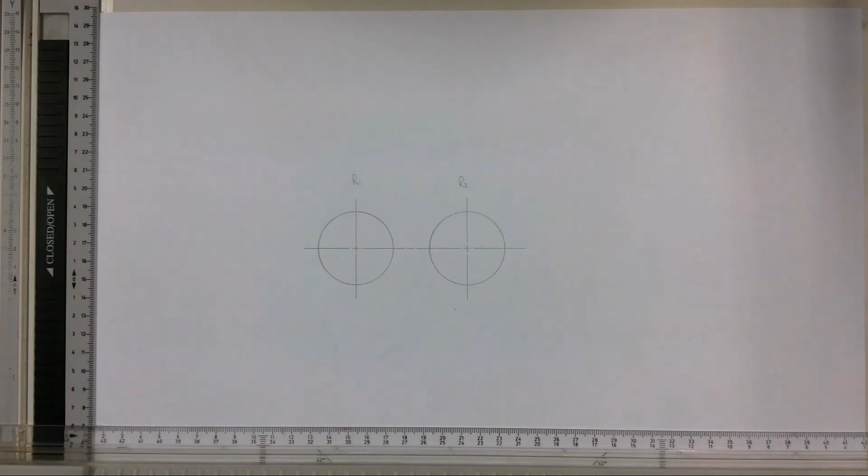The arcs, circles with arcs, and we will be including and excluding these two circles that we have in front of us with a diameter each of 40, so a radius of 20. And I've written down R1 and R2 because they're obviously two different circles. However, they do have the same radii

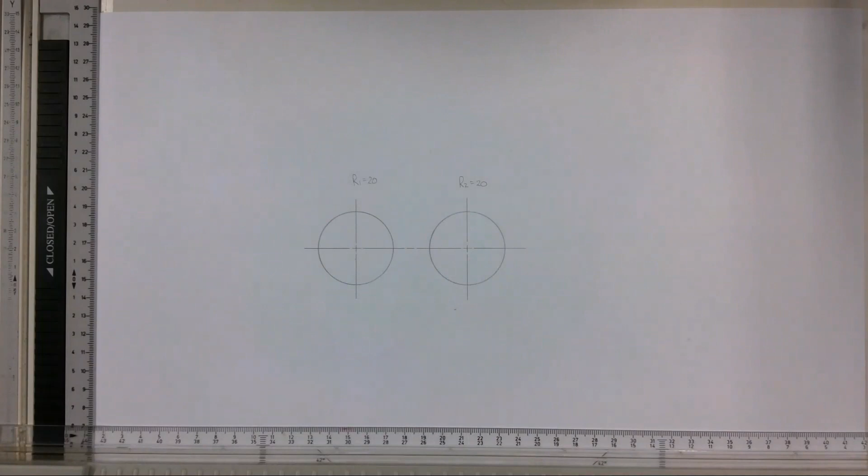to work with. Okay, so to start off with, if I'm going to be including these two, I'm going to be having an arc that goes right over the top, joining them tangentially, nice and smoothly across the top over here. And I need to be able to find a point in which I'm going to be placing my compass point to be able to achieve that.

Okay, so to start off with, usually I'll go R1 minus R2, and in this case, because they have the same diameter or radii, when I say 20 minus 20, it's 0. So my question will be, how will I have to go and join these two with an arc? Well, we've got to remember that the arc that I'm going to join also needs a radius. Okay, so in this case, I'm not going to be using these two circles over here as R1 and R2. I'm going to be using a small r and a big R.

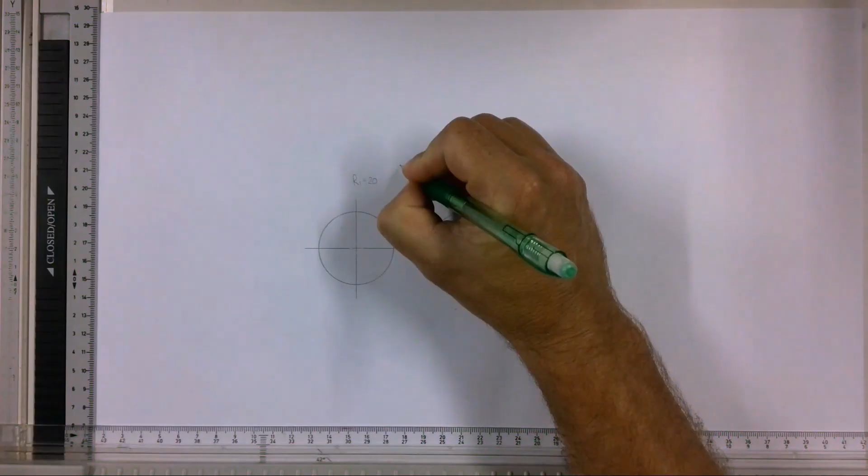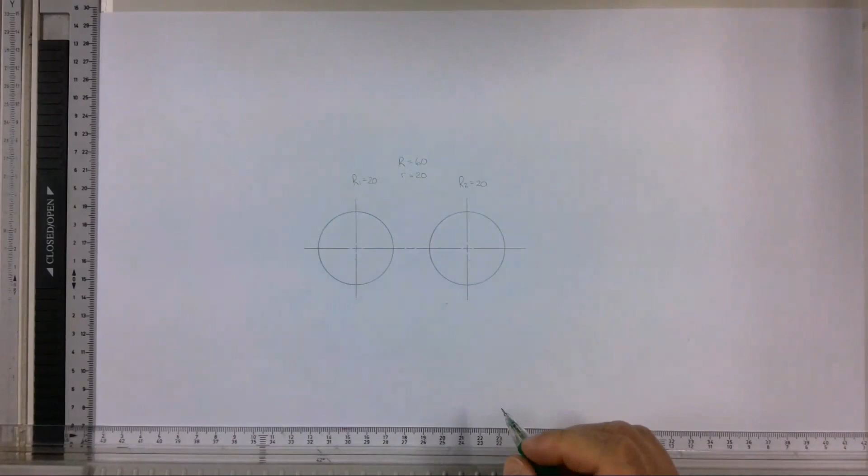So the big R being the arc needed to join the two, and then I've got a small r, which is obviously going to be my radius of 20. In this case, I'm going to want to make use of the big radius of 60 that's going to be joining the two of these circles. So I'm going to be placing 60 over here, and the calculation that should come to mind straight away is 60 minus 20, because remember, I'm going to be joining them over the top, which means I'm including both of these into my arc. Okay, so because I've got 60 minus 20, it'll give me 40.

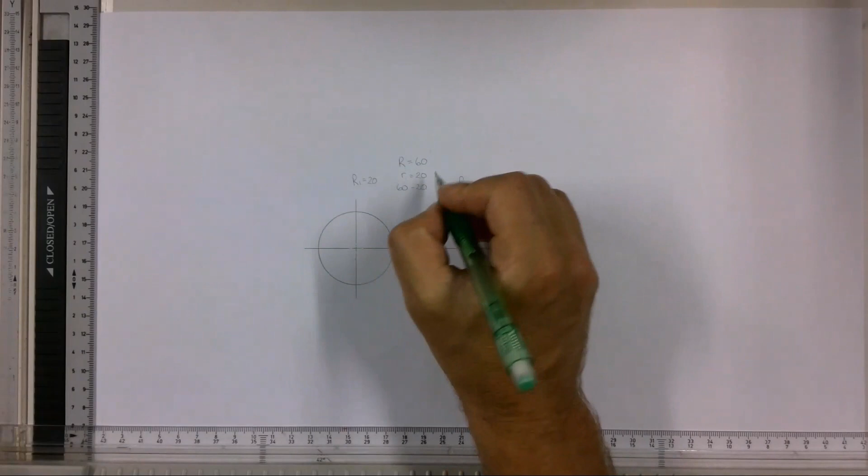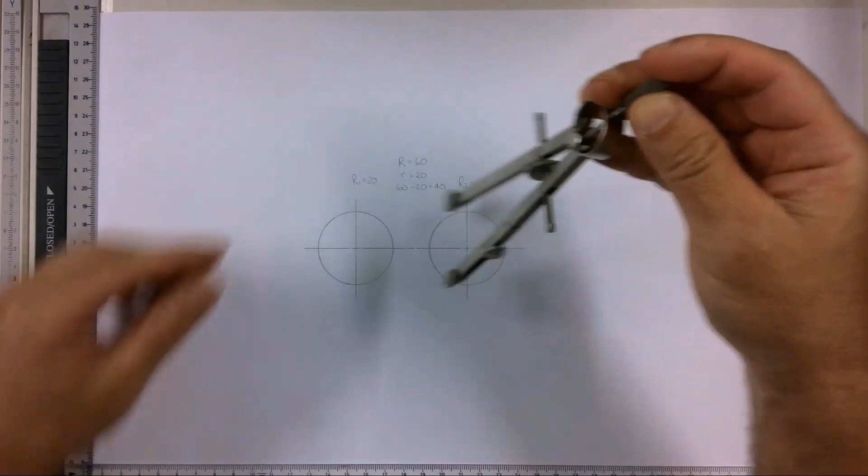I'm going to open up my compass to 40. So I go ahead, I reduce my compass to 40, like so. And the two reference points that I need to make use of are the two most common points between the two, the center of that circle and the center of that circle. I'll make my arc, I'll go to the next one, nice and accurately, and my two arcs will then meet. There where they meet, I'm just going to indicate it with a little plus sign over here. There it is. Let's try and be as accurate as possible.

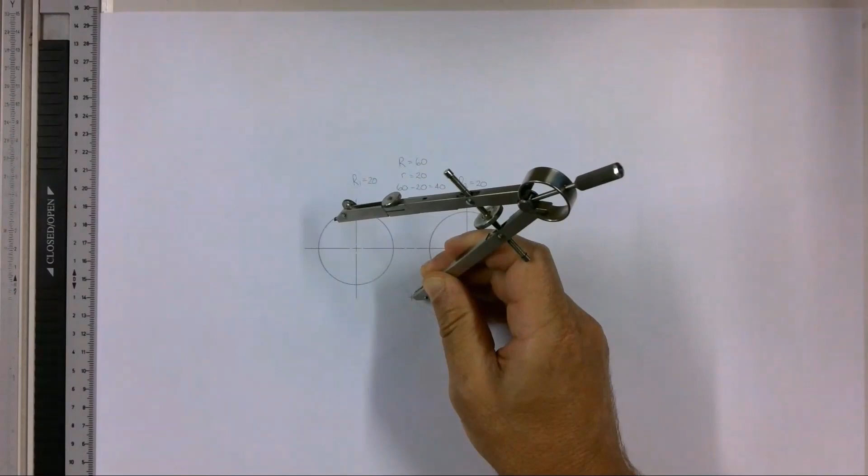And it says that I've got to make a radius of 60 to join this circle to that circle. So I'm going to go ahead and just increase this by another 20, like so. So now I've got the point at which my compass point needs to be. I'm going to see whether it touches over here first before I join, and over here. So they do both touch. I then go ahead and seamlessly put them across, and now you can see that I've joined this circle with that circle with an arc.

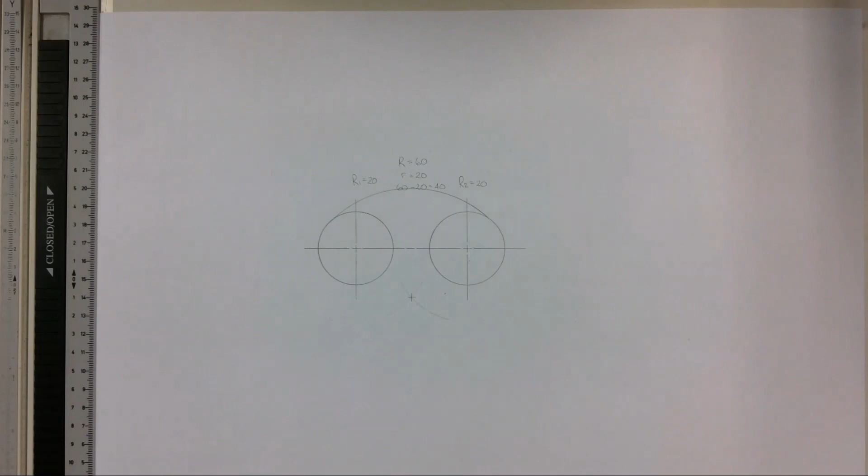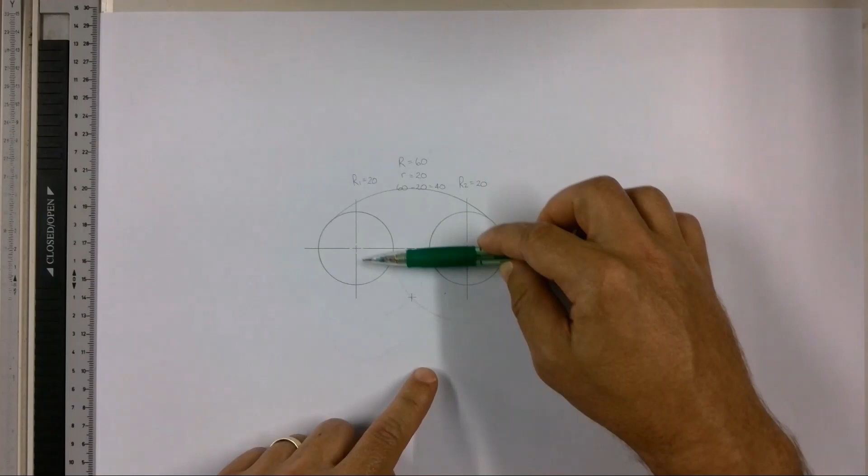Right, so now I'm going to be joining this circle with that circle with another arc. However, I'm going to do it down the bottom over here. And what I've got to keep in mind is that I've got another radius to deal with before I can get to the point that's going to give me this arc between the two. So I'm going to add a radius here. So where I said 60 minus 20, I'm now going to be using 60 plus 20, because that's the radius 20, and the arc that I'm going to be drawing will have a radius of 60. So I'm going to add those two, and it's going to give me 80 to use.

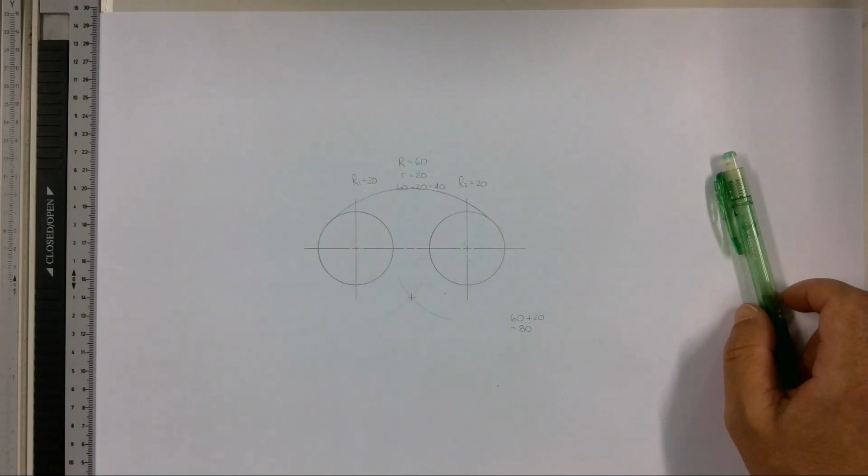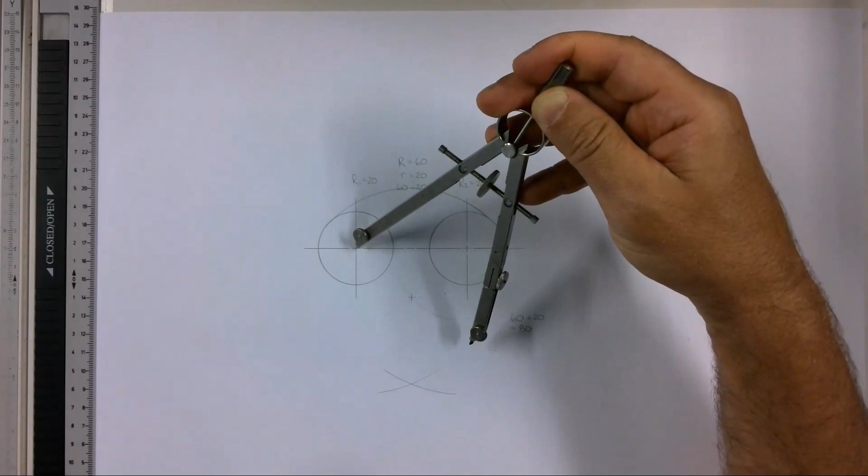In fact, not a radius of 80, but I'm going to be opening up my compass to 80. So I've already got it. 1, 2, 3, 4, 5, 6, another 20. Because the instruction says that I've got to join these two circles with an arc with a radius of 60. So there I've opened up to 80. I scribe my arc from both reference points. Let me just be as accurate as I possibly can be. And they meet up over here. I'm just going to indicate that with a plus sign.

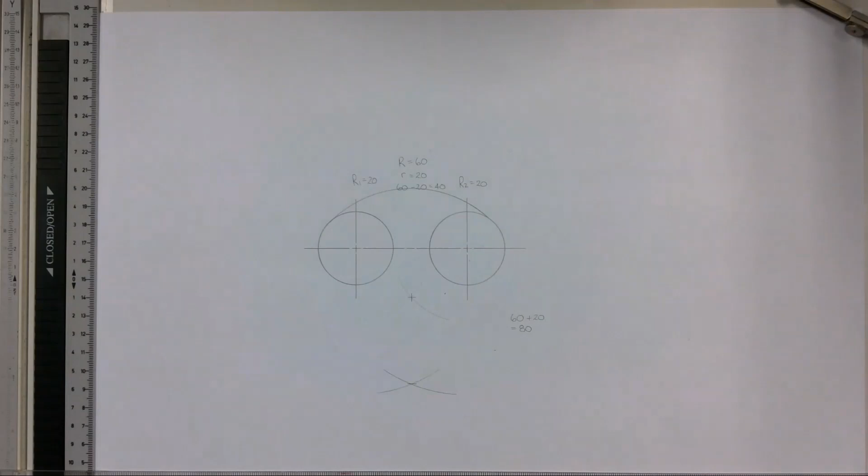And because I have 80 away from the center, it has to be 60 away from my circles, because the further distance is the further 20. So 20 plus the further 60 gave me my 80 to be able to get to this point over here, explaining my calculation that I've made over here.

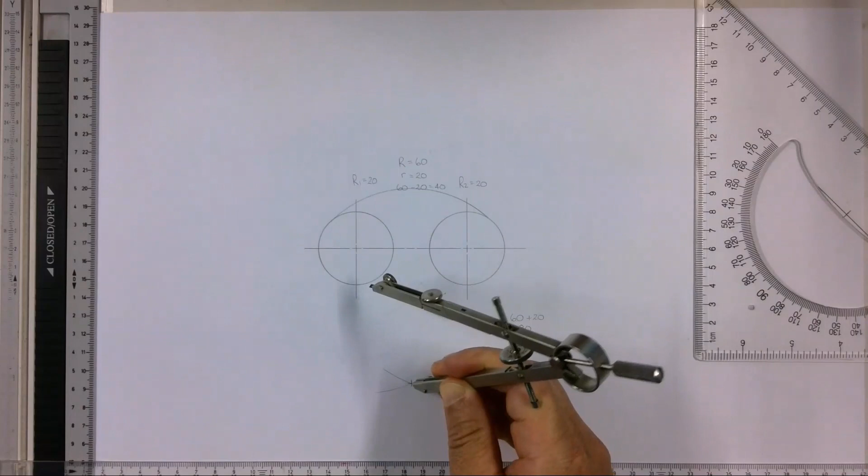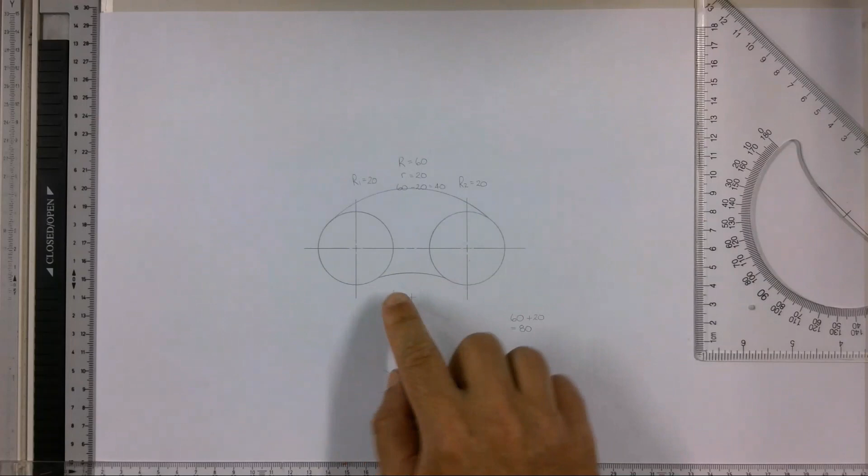Now I'll open up my compass back to 60. So there's my ruler again. I'm going to reduce my compass, place it on my intersection point, and then I'll make sure that it touches seamlessly on this side over here, and on this side over here, and I go ahead and I join them. Right, now I'm excluding my circles. So this should tangentially be able to do so. Mine doesn't end up too accurately. You don't want to have too much of a bump over here. You want it to seamlessly blend in with the arc of the circle.

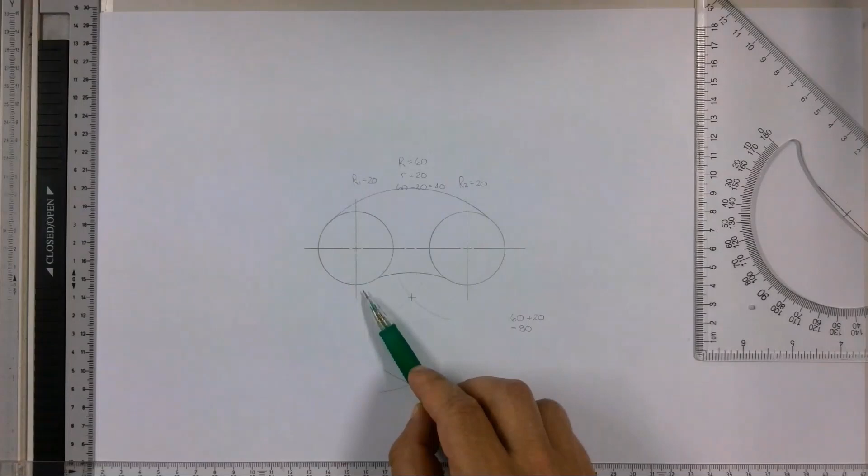Well, I hope you guys have enjoyed this. Please make sure that you re-watch this so you can see exactly why we said 60 minus 20 for the one going over above when we're including these two, and then when we're excluding these two from the arc, we're going to say 60 plus 20. All right, take a bit of practice, and I hope you guys have enjoyed this video.